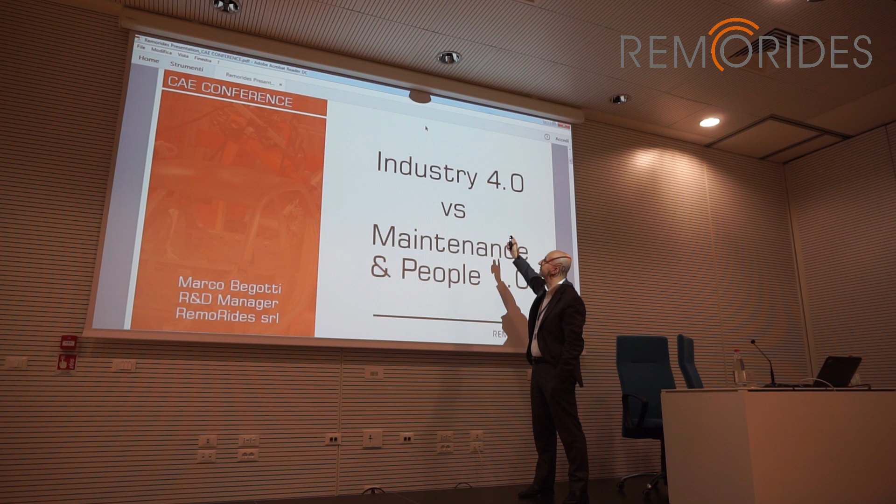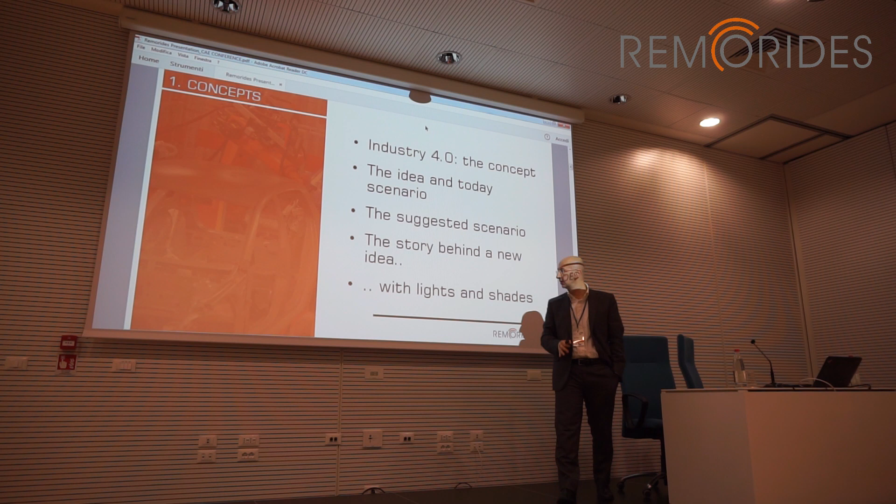So anyway, this is some chapter. This one is the main idea about the scenario of today: Industry 4.0, the idea, suggested scenario, and our story, in a really short time to give you an idea about what we do.

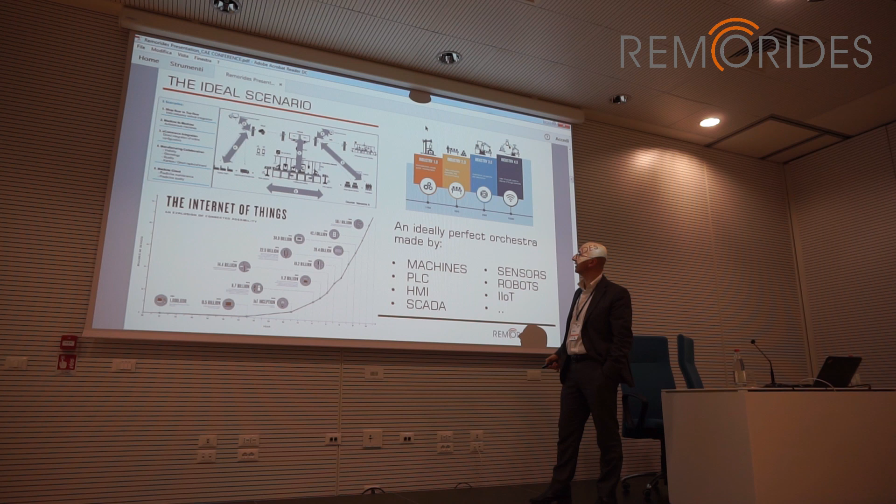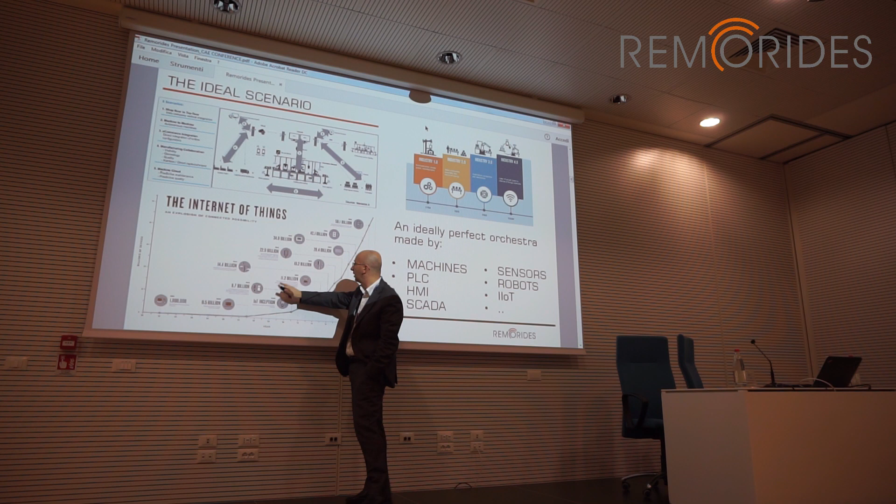So this is some slide I took from the internet, from Festo, and it says what is the plant of the future. You see there from outside, inside, company, robot, connection, and the other part is the Internet of Things. Every day we speak about connection, 11 billion, 15 billion, I don't know, in 2015, 17, whatever.

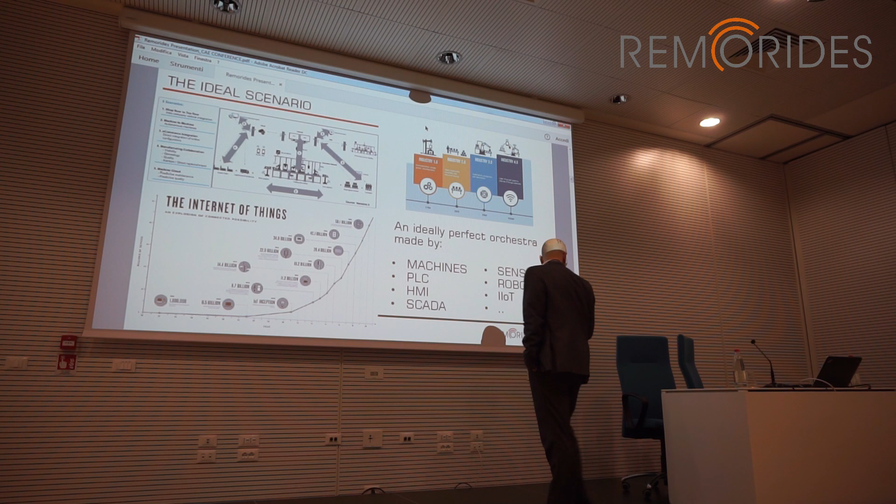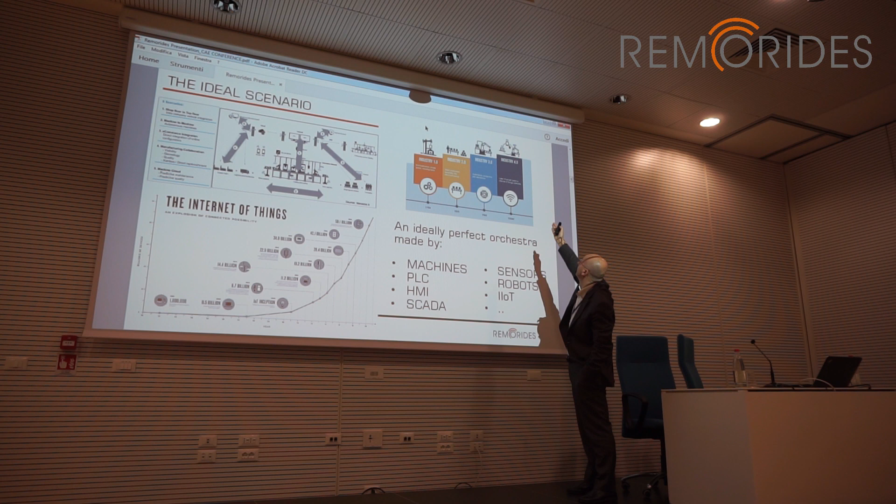So the main idea of everyone is Industry 4.0, like we say today. You see from the beginning to now, what is Industry 4.0 is the robot, so machine, PLC, SCADA, robots. This is our thinking today about Industry 4.0.

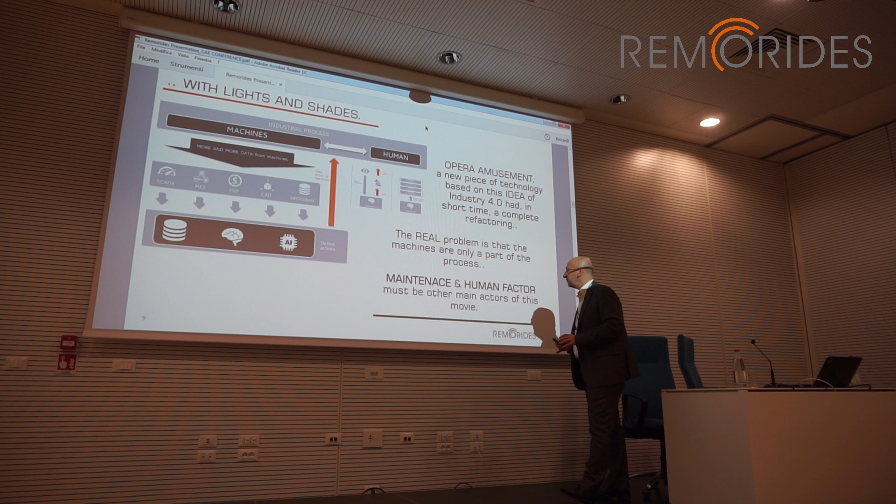We had big success, but not so big, and I'll tell you why. I'll talk to you later, because what happened is that at the end of the day, we understood a big lesson. The lesson was that the real needs of our client was not only this.

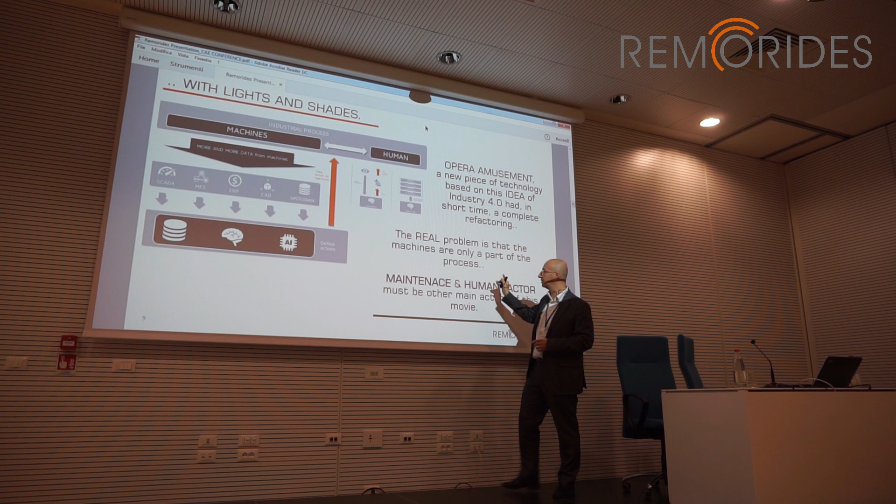This is only one part. We forgot what is the real needs of the people. It means to control the person and to control the process, not only the rides, amusement rides. So we completely forgot all the other actors of our movie, I mean the full scenario.

So okay, we need to step back to try to understand what the real needs of the client were, and generally. And so we started to understand what is today's maintenance. If you take care about the Italian Association of Maintenance, AIMAN, what will you see?

80% of maintenance is based on corrective, based on faults, or preventive, I mean planned. And so 80% we can say is 1.0 maintenance, because there is no connection between - maybe some connection - on process and the normal way it works.

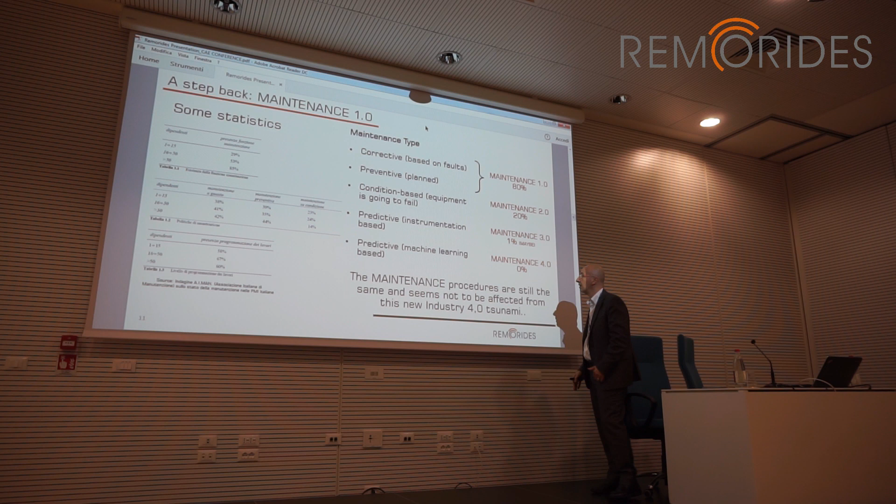Condition based, so I receive some information related to the machine, and in this case I start to do something - that's 20%, and we are moving to maintenance 2.0. Predictive, maybe 1%, but in this case predictive means instrumentation based, I mean vibration or something similar. The last one, predictive, I mean machine learning based, because they start also to think about predictive maintenance, 0.

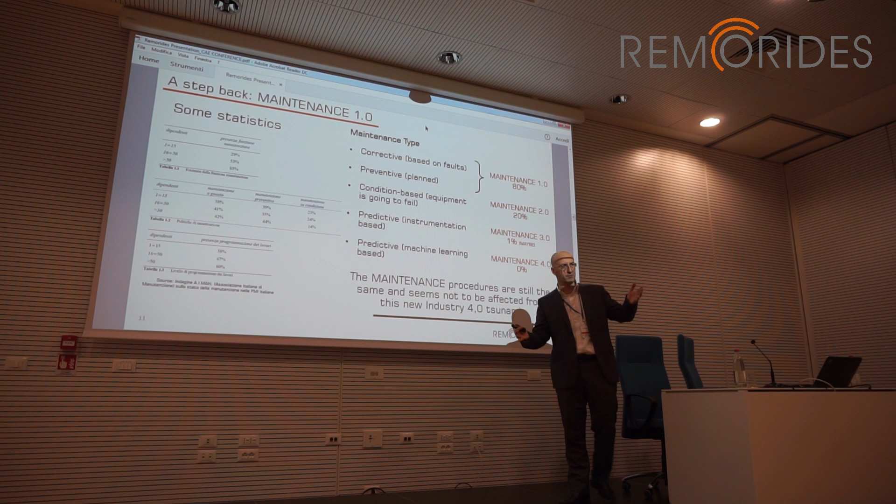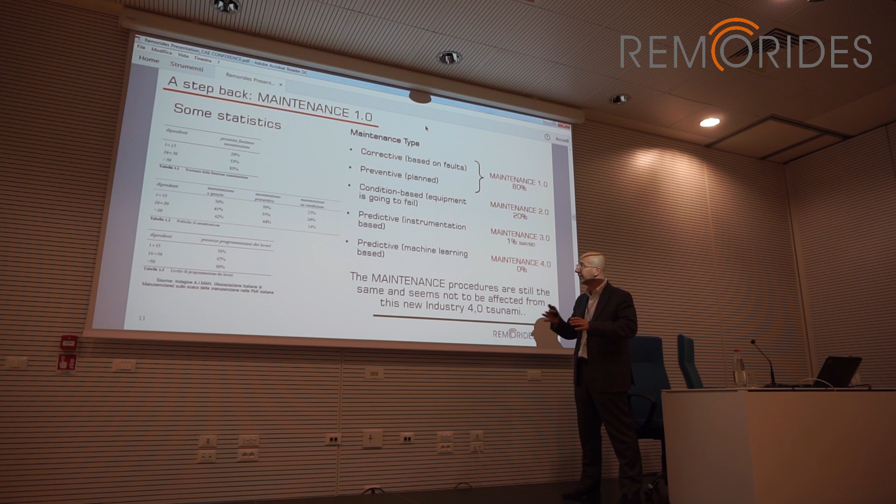Today, maintenance is a really important part of the process, because if there is no maintenance, it means no quality on the production, and also failure and stop of the process. No maintenance, no good production. So is maintenance completely outside this world of Industry 4.0, or a little bit?

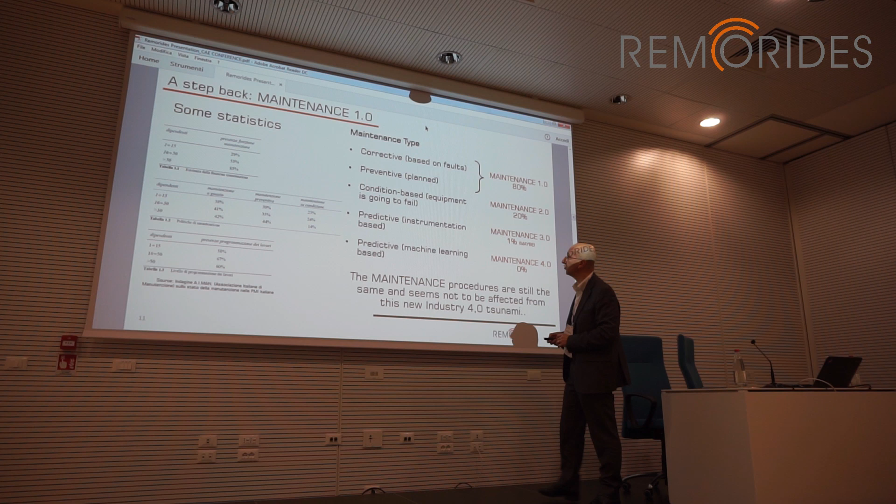Again, people ask why 1.0, maybe 0.0. So we started to study, and we discovered that 80% of all accidents are caused by human factor. This is in petrochemical, medicine 60%, warehouse cargo, air, automotive, similar numbers. We have more than 80% of the problem related to human factor.

So we say, okay, what can we do? What we can do is take care of the full process inside the whole company. All this information must drive the tracking of the maintenance technician, and this information must arrive on the machine, and also the tracking of the production worker. But it doesn't mean the worker connected to the HMI pushing a button - it's a person who turns around the company, using a mobile device, taking information. This is what we want.

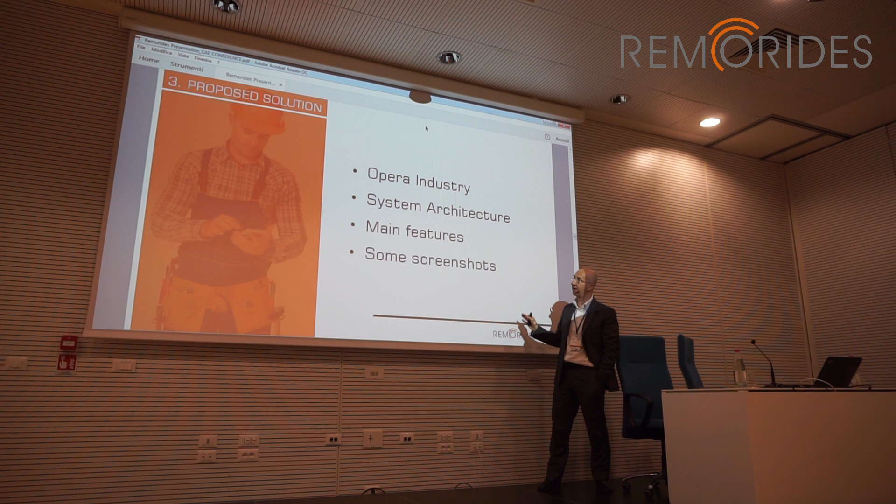So what happened? In a couple of years, we made a complete refactoring of our application, and the balance between machine data and human data started from this point to arrive more or less at the same level, maybe more based on person. I will show you just some screenshots to show this.

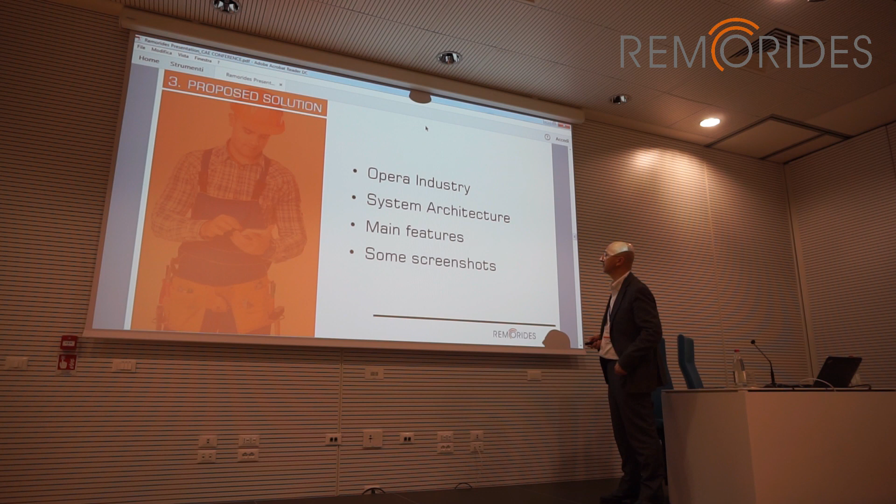What is the central point is this device. Every day you have this device in your pocket, and we don't move without this device. Why don't we use this? So what is the architecture? The architecture is a server. This server could be on-premise in the company or in the cloud on our server.

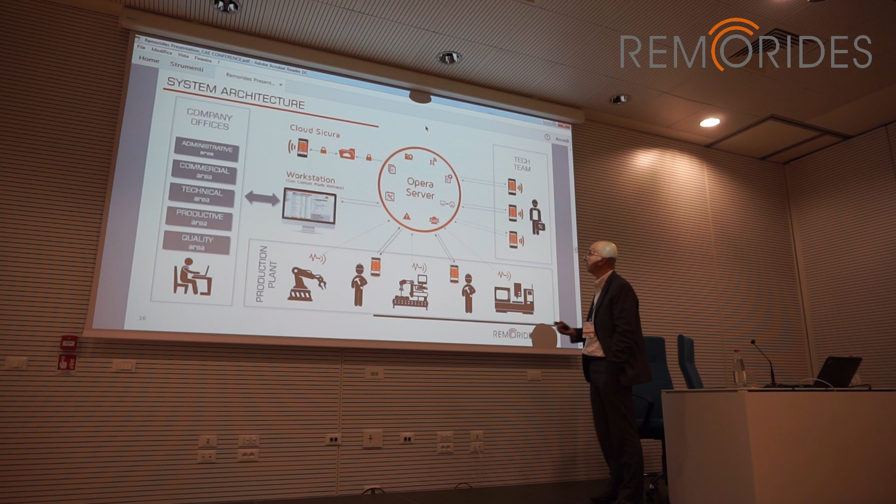This solution starts from bringing information from all the information that comes from the office. We connect to ERP, we connect to PLM, we connect to CAD, and this information goes through the server. This server is fed by sensors that come from the machine. Normally we use an OPC server, which is the common bus used to bring information.

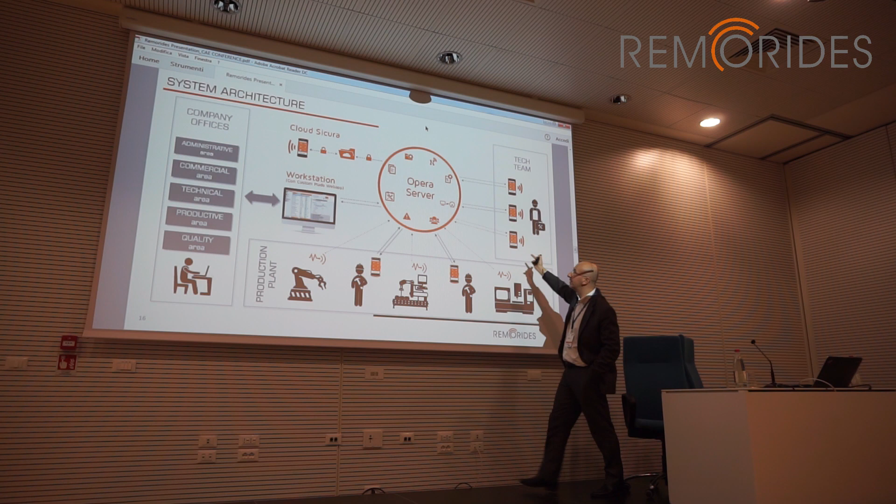But what is the difference between a production plant and Industry 4.0 that you have seen before? This: inside the process, there is now a new element, which is the person, and this information is used inside Opera like all the other information. It's like gathering data from the device, the same as from the people. And on the other side, using the same information, there is the maintenance team, so we cover from this point to the other point, and all the process is in the hands of the people.

What is the main feature? The feature is we have the real-time state of the machine. Every time there is an alert or there is information, this information arrives to this one and to the web application, and all the storage. So it means there is full data storage of this information.

Process management - it means that every piece of information that normally you'd use by paper is now on the mobile device. So you can bring information related to quality control, you can bring information related - today we are using in our company to make a factory acceptance test, because this way there's a list of all the jobs that the people must do, and they follow all the jobs.

Content management - if we want the people to work in a good way, we need to provide them all the information related to the job they need to do. So on this device, on the web application, you can upload every kind of content: documents, manuals, videos, spare parts, every piece of information that could be used by the person on site.

And finally, team communication. Why did we introduce this platform? Because 80% of the problems are caused by person, but many of them are also related to mismatching communication between people. So we introduced a sort of WhatsApp communication inside the process. So you can see, from one side you can have information from the machine, and on the other side, you can have information from the person.

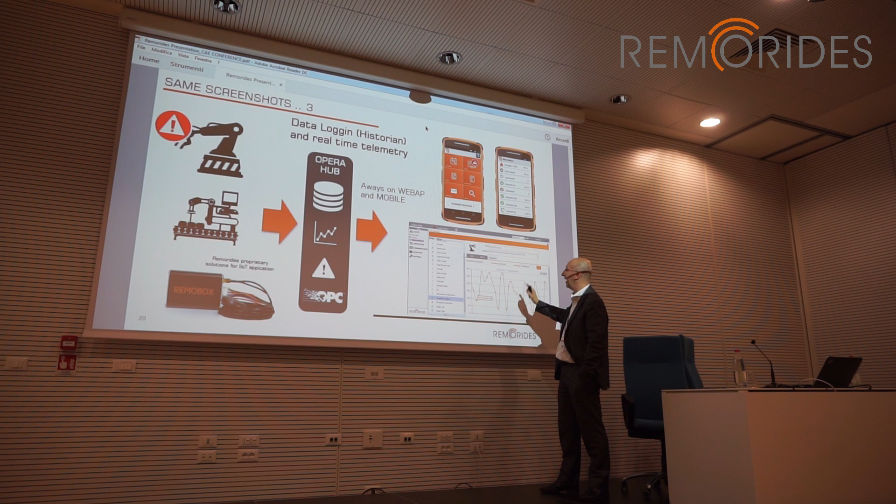Also, for sure, this is the starting point, the information related to the machine. We normally have connection with the machine, so normally it's PLC, and we are using now OPC server, and we have included OPC client in our software. So we have real-time information and history, and we can make statistics as well. Okay, so another picture.

Just a few case histories, because the product started in 2013 and we're in 2017. We've moved into 3 different fields. Today we have 3 branches. One is Opera Amusement, the original one, and one of our clients is one of the biggest owners of amusement parks in all the Middle East. He has around 800 amusement parks. Opera Audit comes from the same core but is used by inspector bodies, and we are also dealing now with huge inspector bodies in Germany and other parts of the world.

And the other one is the last one we introduced, industry related, in Italy, because we started from outside and now we've come back to Italy too. This is one of the main clients. He has 85 theme parks, 600 machines, and 100 people in this one. So this is the starting point.

We are moving with other clients, mainly in the Middle East, now in Europe, and maybe in the future the US or somewhere else. This is our client, LTC, the biggest inspection body in UK. They started using our system because they go on-site to make an inspection. They use only this to make the inspection. At the end of the day, they make a click and receive the report, and send it immediately to the client with all the condition failures, all the images, all the information, without touching paper.

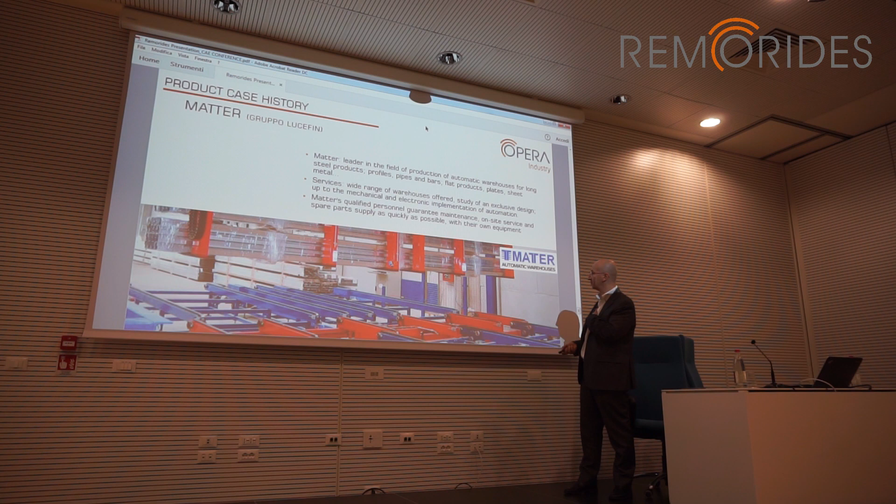And finally, it seems quite complicated, but this is what we are doing in this company, and we are finishing now at the end of November. What is the beauty of it?

We start from ERP, so they launch the order. The order uses information related to the database. It goes directly to the PLC. This information goes to the office on Opera. The information also goes to production, so people can see the production on a smart device and see what happened in the whole production, and the related information. Again, human data, I mean process data, comes back to the machine, etc., right to the end.

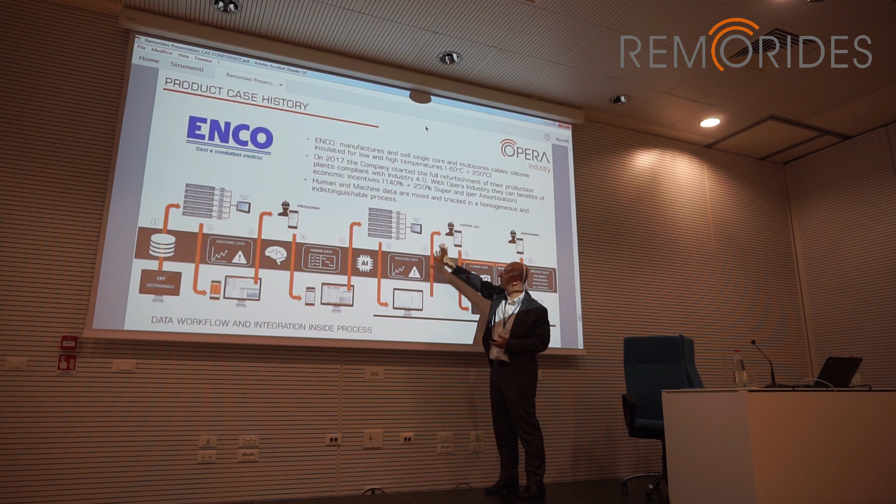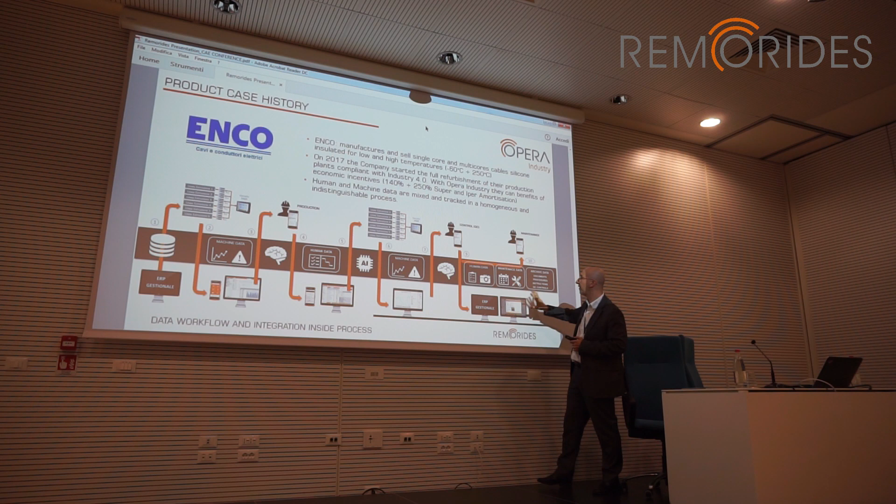So at the end of the work, they can also add quality control, because sometimes you have paper notices somewhere related to control, and you have tracked everything. So for each product, you have the full story, from the beginning right to the end, you have the full story - not only of the data, but of the process. This is what we are doing.

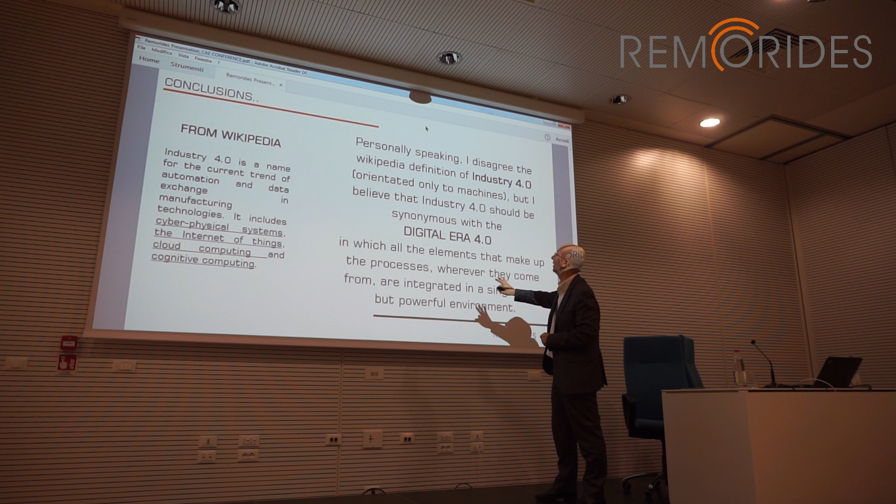So, what is at the end? It's 5:30, so maybe it's enough. But I'll start from Wikipedia. Wikipedia says, okay, Industry 4.0 includes the cyber physical system, the Internet of Things, cognitive computing.

I don't agree, but if you really want to make a big step, Industry 4.0 is not only this part. We need to move to the digital era, where all the information is digitalized, where information from machines and from people is melded together into one unique platform. This is what we are doing. Thank you.